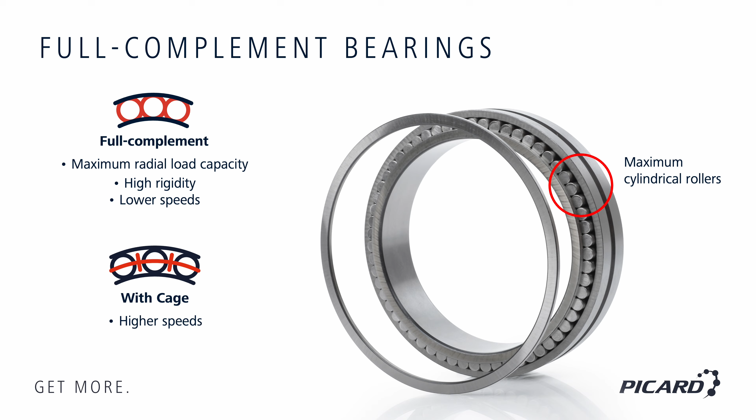A full complement cylindrical roller bearing is a radial roller bearing, one without a cage. This means it can accommodate the maximum number of cylindrical rollers, which significantly increases the bearing's load capacity and rigidity. Full complement bearings are therefore ideal when very large radial loads need to be accommodated. However, permissible speeds are lower because without a cage, the rollers sit directly next to one another. A cage, by contrast, separates the rollers, reduces friction, and enables significantly higher speeds.

At Schaeffler, the designation for these bearings begins with SL, standing for heavy load. The series is called SL18. In these bearings, the outer ring has one fixed rib, and the inner ring has two fixed ribs. The specific bearing series, and therefore the dimensions, are defined by two additional digits: 18, 22, 29, or 30.

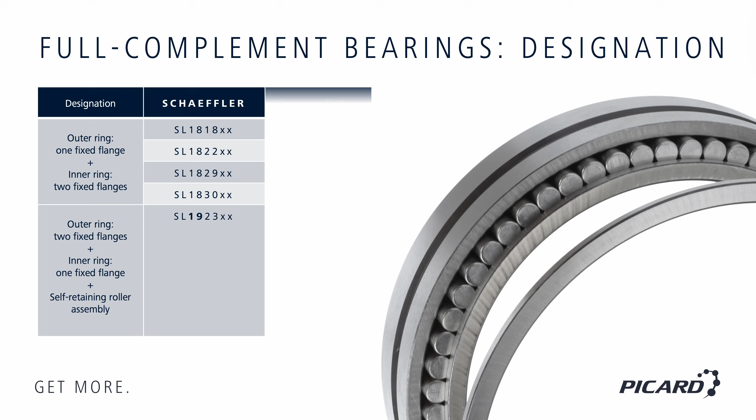A further series is the SL1923. Cylindrical roller bearings of this design have two fixed ribs on the outer ring and a self-retaining roller and cage assembly, while the inner ring has only one fixed rib. This is followed by the bore identification number. Other manufacturers use slightly different designations. SL18 is replaced by NCF, and SL1923 corresponds to NJ23 with the suffix V for full complement.

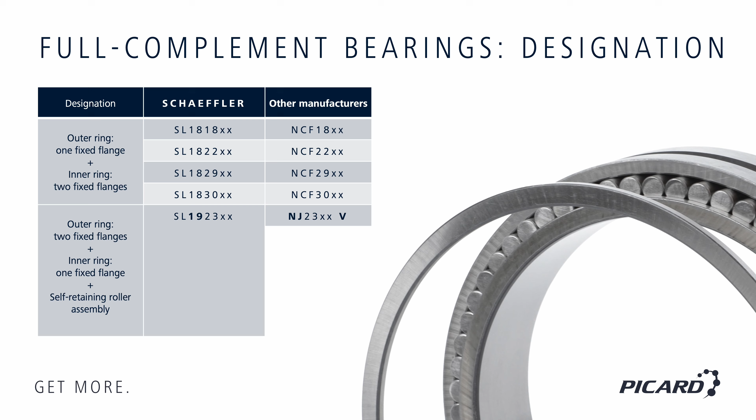Multi-row cylindrical roller bearings contain several rows of cylindrical rollers, making them particularly well-suited for high radial loads, offering even greater rigidity than single-row bearings. They are especially useful in applications where a thin cross-section ring is required. The designation builds on that of the single-row design and is simply extended by adding a second N at the beginning.

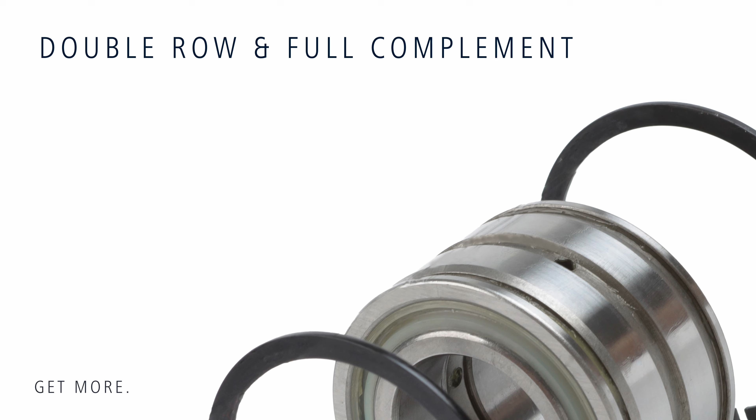This design combines the advantages of both concepts: a maximum number of rollers thanks to the full complement design, and two rows through the double row configuration. The bearings are self-retaining and feature a circumferential groove and lubrication holes in the outer ring, which significantly simplify lubrication. They are particularly suited for applications that must accommodate not only high radial loads, but also high axial loads. The individual variants differ in the arrangement of ribs on the inner and outer rings.

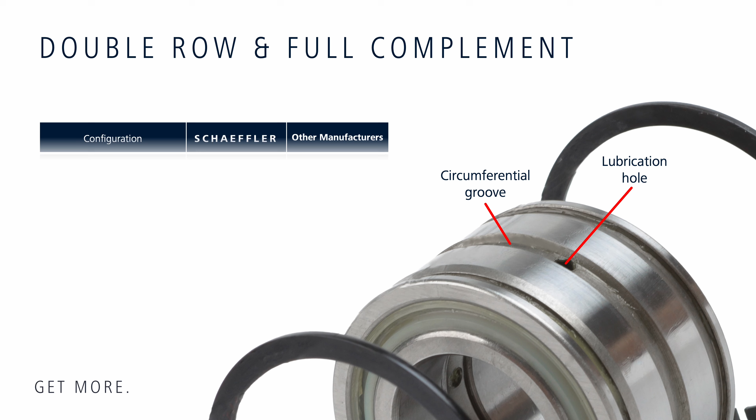Here are a few examples. The SL02, known at other manufacturers as NNCL, has three fixed ribs on the inner ring. The outer ring has no ribs. The SL1850, or NNCF50, also has three fixed ribs on the inner ring, but additionally features one fixed rib on the outer ring. And the SL01, equivalent to NNC, has three fixed ribs on the inner ring and two fixed ribs on the outer ring.

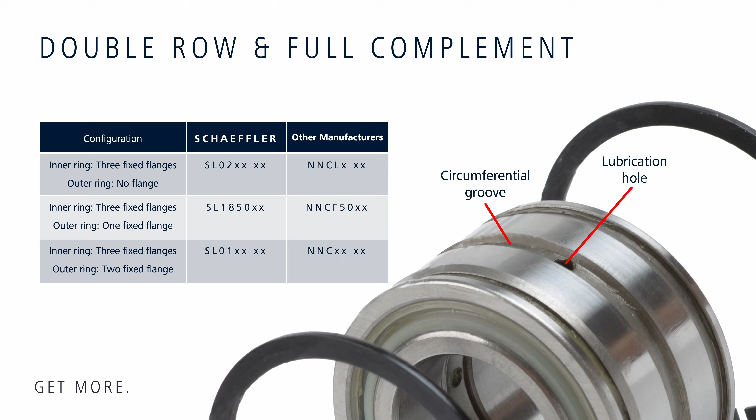Sealed cylindrical roller bearings offer a number of advantages. The seals reliably prevent dirt, dust, or moisture from entering the bearing, while simultaneously retaining the lubricant inside. This significantly reduces maintenance requirements, as relubrication is needed far less frequently. At the same time, bearing service life is extended because contaminants that could cause wear are kept out from the start. For special applications, custom seals are also available. For example, for high temperatures, specific lubricants, or heavily contaminated environments, such as those found in sintering processes or dust-intensive operations.

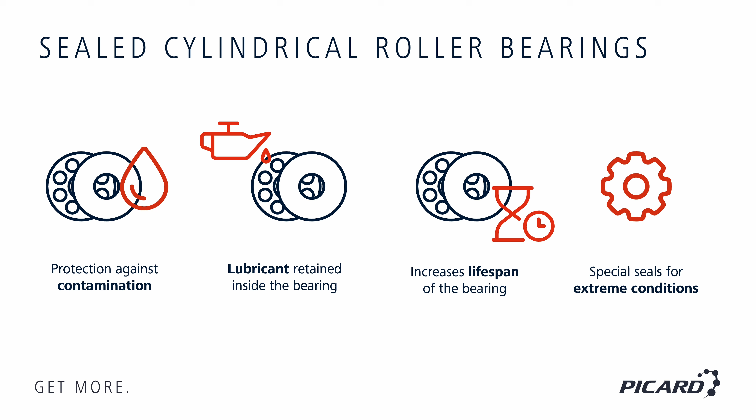The permissible operating temperature of a cylindrical roller bearing depends on several factors, primarily the bearing rings and rollers, the cage material used, and the lubricant selected. In the standard design, cylindrical roller bearings are rated for temperatures up to approximately 150 degrees Celsius without any adverse changes to shape or dimensions, meaning running performance remains stable. At higher temperatures, bearing designs of the kind typically found in the aerospace sector are used. These commonly feature temperature-resistant metal cages made of steel or brass, which retain their strength and stability even at significantly elevated operating temperatures.

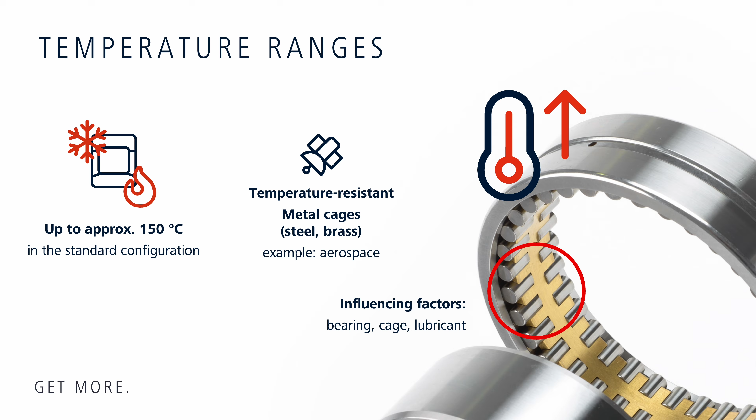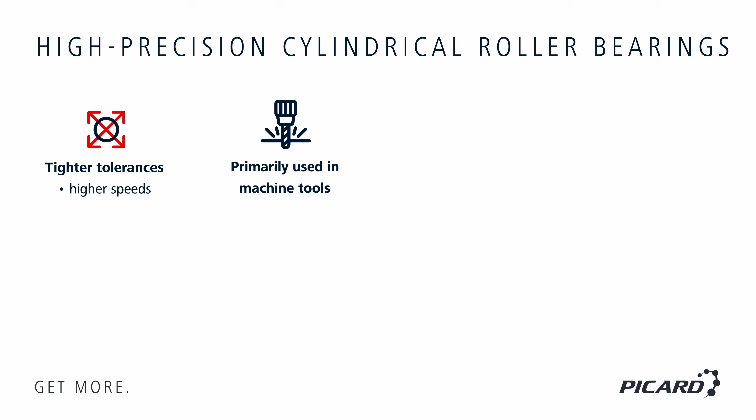Cylindrical roller bearings are also available as high-precision bearings. Thanks to tighter manufacturing tolerances, they are suitable for higher speeds and are used primarily in machine tools, such as turning, grinding, and milling machines. They are manufactured in both single-row and double-row designs and are used wherever a radially rigid, load-bearing, and high-precision mounting arrangement is required. For precise radial clearance adjustment, these bearings feature a tapered bore. By shifting the bearing axially along the tapered seat on the shaft, the desired radial clearance or radial preload can be set. Alternatively, these bearings are also available with a cylindrical bore.

The base designations are N, NN, or NNU in the dimension series 10, 30, or 49. The tapered bore is indicated by a K in the designation, and the particularly tight tolerances are identified by the suffix SP.

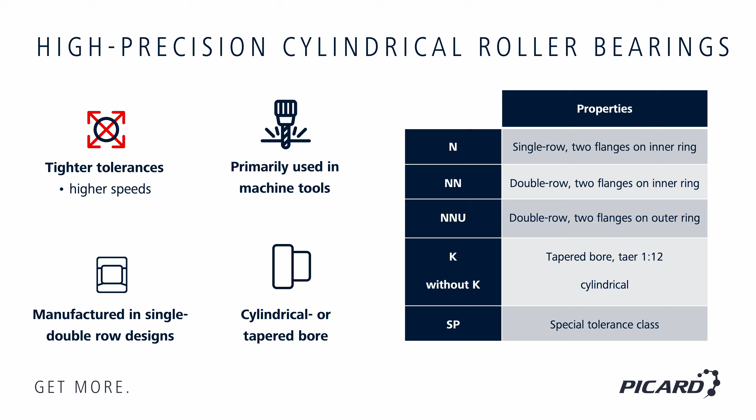In our next webinar, we'll explore the fundamentals and history of self-aligning ball bearings and spherical roller bearings. If you'd like to learn more, we look forward to welcoming you back for the next session.